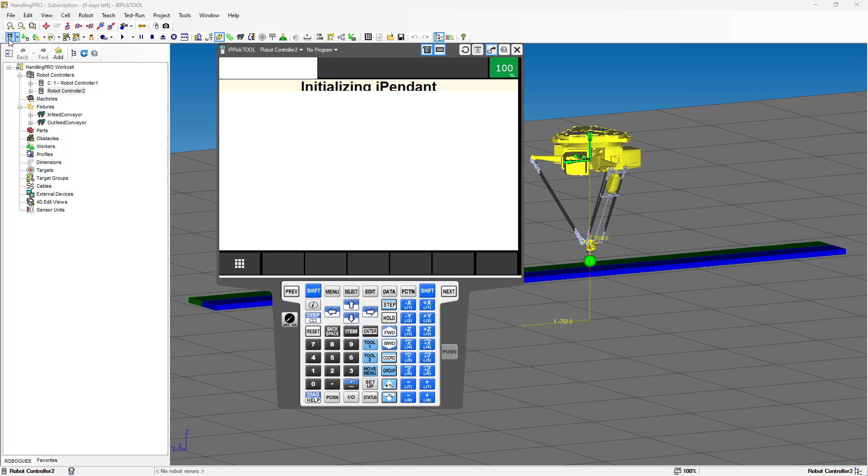We're going to go back to Roboguide. We're going to select robot number 2, and we're going to open the teach pendant. Make sure that you have the teach pendant open for robot controller number 2. We're going to press menu. We're going to select setup. We're going to select host communication.

We already set up the IP address. So now we need to select RIPE. This is ROS Ethernet Packets. And we're going to press detail. So here, robot number 2 is going to be the slave. And if you look at the setup RIPE screen, it's showing the master. So we have to make sure that we select the slave.

So over here, we're going to select slave. And you're going to see that this button changes from slave to master, and on the screen, it changes to slave. So we're going to look at the robot name. It's going to be robot number 2. The port, in our case, we are using the Ethernet port number 1. We need to leave it that way.

The master IP address is going to be robot number 1. We need to change this one to 127.0.0.2, and automatically it changes to number 3. The member index 1 is always going to be the master, so this robot number 2 is going to have member index number 2. If you keep adding more robots, you're going to increase the index by 1.

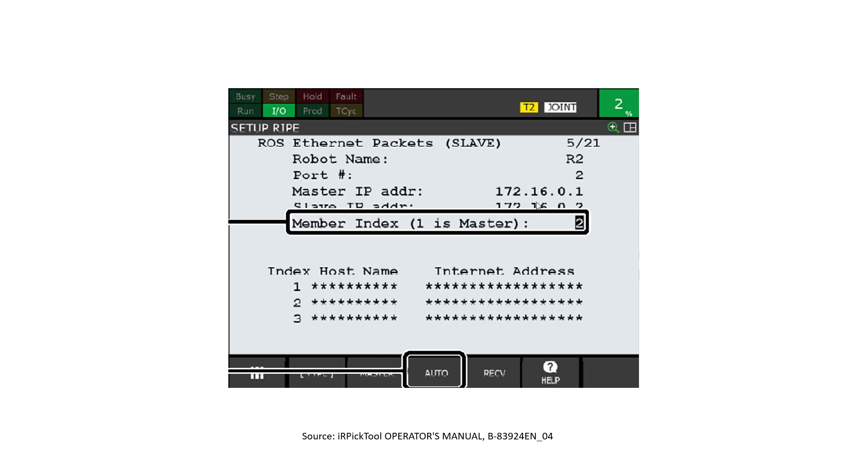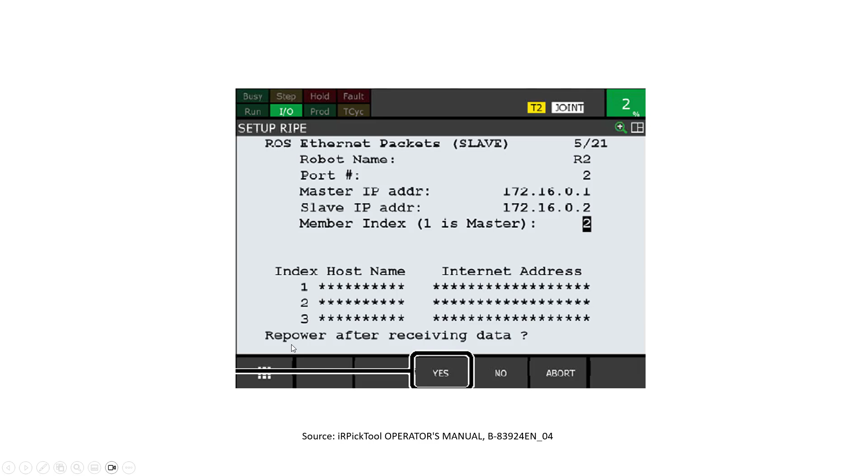We have the name of the robot, it's going to be number 2. In this example, they are using port number 2. And we have the IP address for the master, and we have the IP address for the slave. And the member index is 2. So at this point, we're going to press auto. The screen is going to change, and it's going to say repower after receiving data, and we're going to select yes.

And at this point, the screen is going to change again. It's going to say waiting for data, press PREV to cancel. And we're going to leave the slave in this state. And if you have more than one slave robot controller, you need to do exactly the same for all the other robot controllers until you finish with all the slaves.

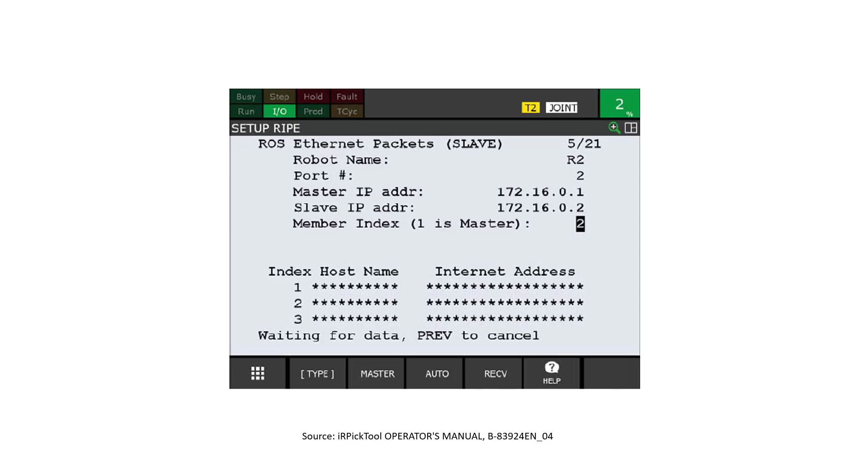Now we're going to go back to the master robot controller. We're going to change the teach pendant to robot controller number 1. We're going to do exactly the same. We're going to press menu, setup, host communication. We're going to select RIPE, and we're going to select details.

In this case, robot controller number 1 is going to be the master, so we have to make sure that it says master over here, otherwise you just invert it by pressing slave on this selection over here. It's going to show the name of the robot. It's going to show the Ethernet port that we're using. This is port number 1. We need to select the IP address.

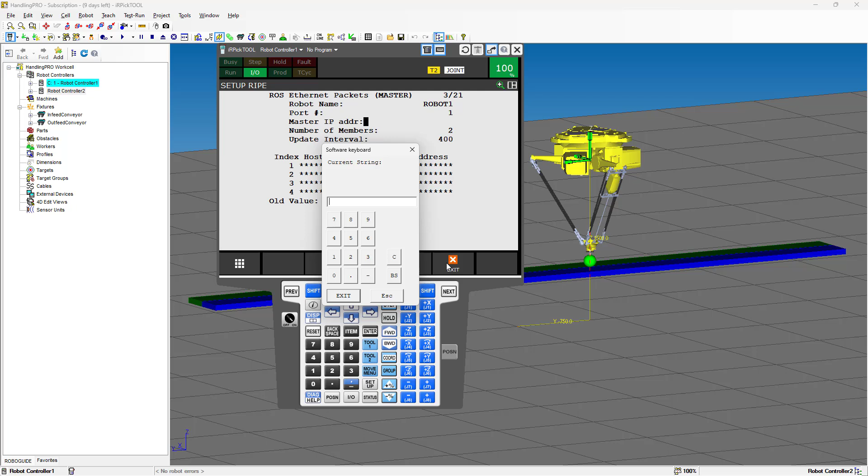The number of members is going to be 2. And the update interval is going to be 400 milliseconds. This update interval is something similar to the requested packet interval that we have in Rockwell PLC. It's saying how many milliseconds it's going to take for updating the data for the other robot controllers. If you find that the update is very slow, you can decrease this value, but by default it's showing 400 milliseconds, and we're going to leave it that way.

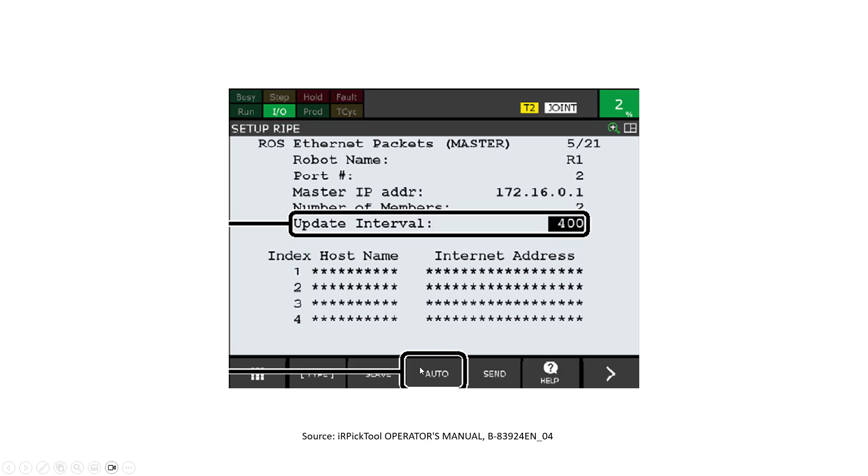So now at this point, again, I cannot show you how it's going to look in Roboguide. We need to go back to the screenshots. This is a screenshot for the master. We're going to press auto again. It's going to say put all the slaves in auto mode. We're going to select continue. And it's going to say cycle power for setting to take effect, and we're going to select yes. And when we do that, all the slaves and the master are going to cycle power at the same time.

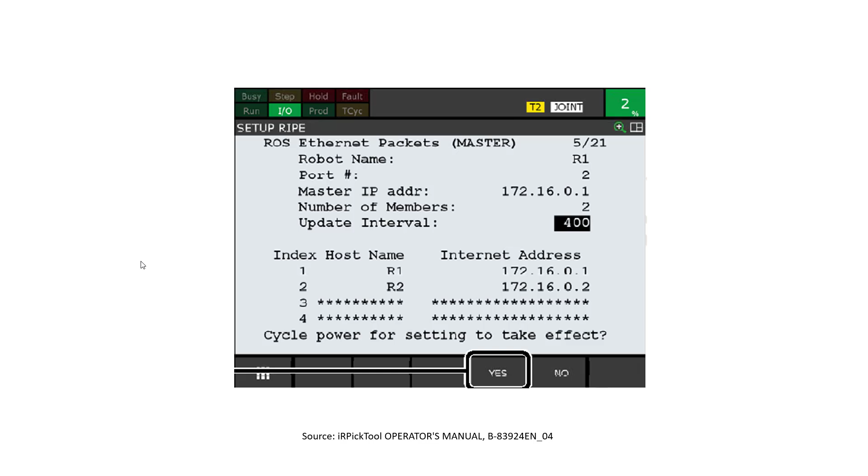We're going to go back to Roboguide. We're going to select cell, and select RIPE setup. It's going to show a pop-up window. Over here, we're going to select robot controller number 1. The host name is robot1, and it's showing the IP address. And we're going to select robot controller number 2, the host is robot2 with its own IP address. It's going to show again the update interval is 400 milliseconds, and we're going to press apply. And we can close the window. So this is the way that we have set up the RIPE ring on Roboguide.

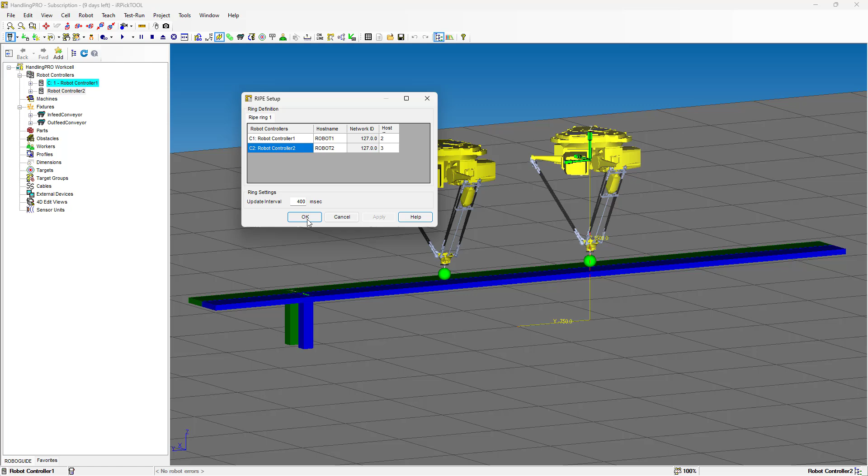And now it's just cycling power on both robot controllers. After rebooting, we're going to select robot controller number 1. We're going to press menu again, go to setup, host communication, RIPE, details, and you're going to see here on the host name the list with robot number 1 and robot number 2 and their IP addresses. If you go to robot controller number 2, it's going to show exactly the same list.

One more thing that you can do to verify the communication between the two robots is working: immediately after cycling power, you can select menu, alarms, alarm log. We're going to select history, and you're going to see that you get the alarm RIPE-008 robot number 2 is online.

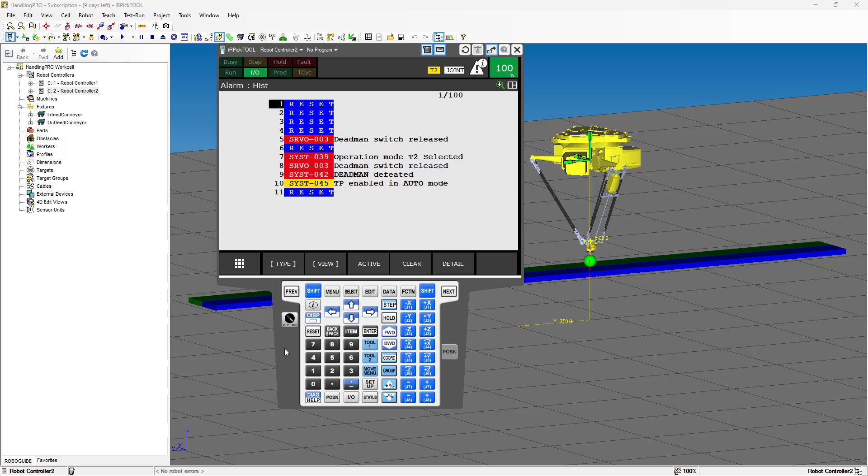If we select robot controller number 2, we're going to select menu, setup, host communication, RIPE detail, and it's showing here in the list. And we're going to select menu, alarms, alarm log, history, and in this case it doesn't show anything. It's only on the master. And with this, we have finished with the configuration of the RIPE.

We're going to go back to the iRPickTool setup workflow. The next step is setting up the encoders for the infeed and outfeed conveyor on the robot master and slave. First, we need to decide what type of encoder we're going to use. There are two types of encoders: the serial incremental encoder shown on the left and the incremental encoder shown on the right. In our case, we're going to use the one on the right.

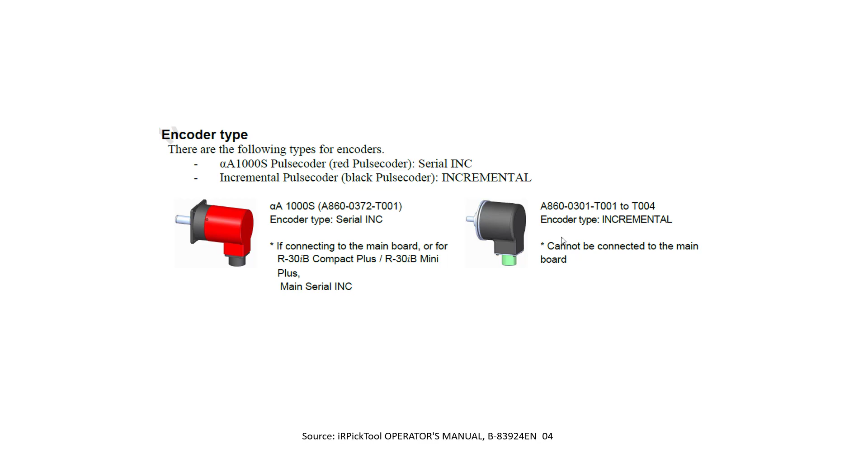Next, we need to decide how we're going to connect the encoders to the robots. One way is using the line tracking interface, where we install the line tracking interface board in the master robot controller, as shown in this diagram. The infeed and outfeed conveyor encoders are connected to the line tracking interface board, and using the RIPE ring, we send the pulse counts to the robot slaves.

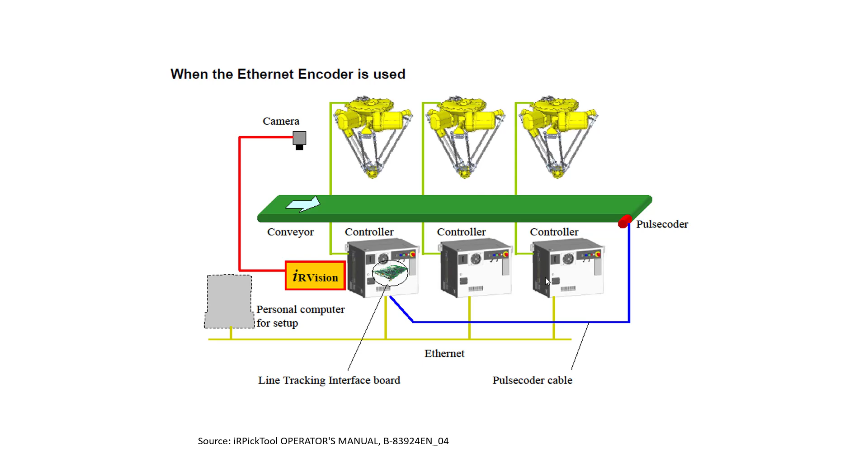Another way is using a multiplexer, where we have a line tracking interface installed on each robot controller, and we use an encoder multiplexer to send the pulse counts to each robot. In our case, we're going to go with the first option, where we have only one line tracking interface board.

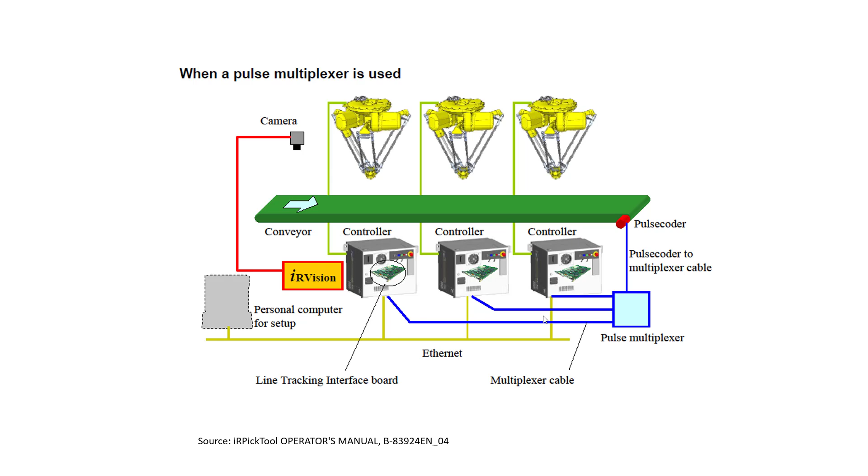In this diagram, you can see what the line interface board looks like. There are two options, the mini slot and the wide mini slot. It all depends on the robot controller that you have. In the case of the LR Mate robot controller, you need to use the mini slot, and you connect both encoders

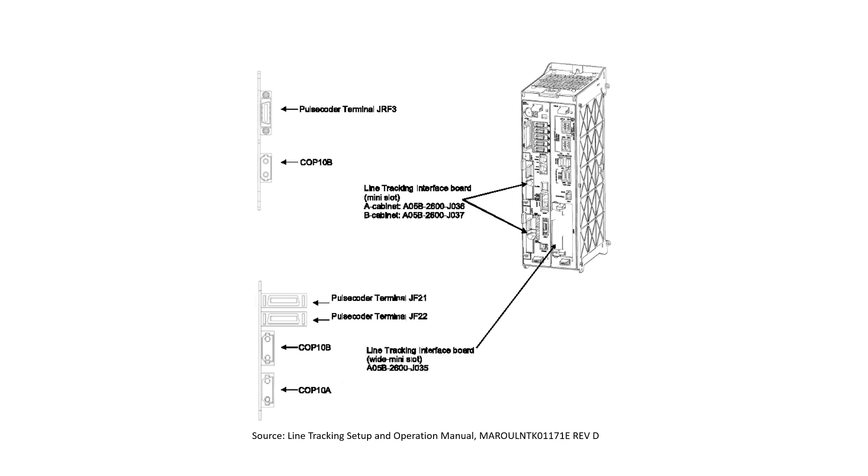to the JRF3. In this diagram, you can see how you connect the infeed conveyor encoder and the outfeed conveyor encoder on the same connector on the JRF3. And if you have the wide mini slot, you have two connectors, the JF21 and the JF22, where you connect the infeed conveyor encoder to the JF21 and the outfeed conveyor encoder to the JF22.

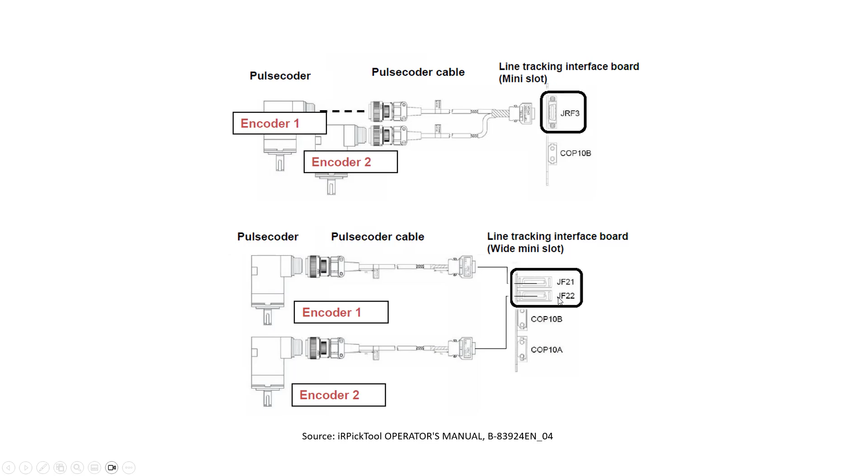We're going to go back to the workcell, and we're going to configure the encoders. One thing to notice is that in order to use the Ethernet encoder, all the controllers connected to the ring must have the same software revision. We're going to select robot controller number 1, and we're going to open the teach pendant. I'm going to split the screen.

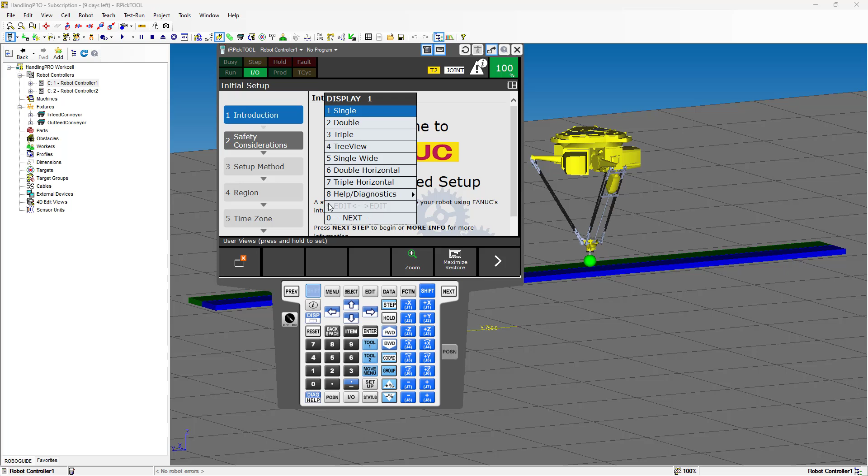I'm going to select menu, setup, and encoders. Encoder number 1 is the one connected to the infeed conveyor. Make sure that you have the Ethernet encoder option R762 installed, otherwise you're not going to see lines 10 and 11. So we're going to select encoder axis. Here you can select the encoder that you want to use. We are not going to change the encoder. It's encoder number 1.

Encoder type, we're going to have the incremental encoder. We're going to go to encoder enable, and we're going to enable. You can change from off to on. Current count, we're going to change that. Average update, we're going to change that to 10. The 10 is the normal value that you use to smooth out the encoder.

And then we're going to select line number 10, where we're going to enter the index for the Ethernet master RIPE ID. That's going to be 1. And the encoder master is going to be 1.

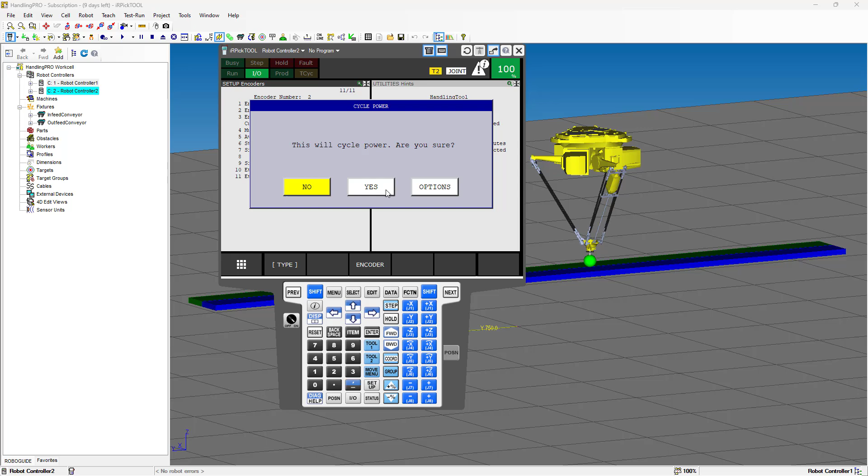Master is going to be 1. And the Ethernet master encoder is going to be 2. Now we need to cycle power again in order for it to take effect. We're going to select robot controller number 1. We're going to go back to the encoder and we're going to select encoder number 1.

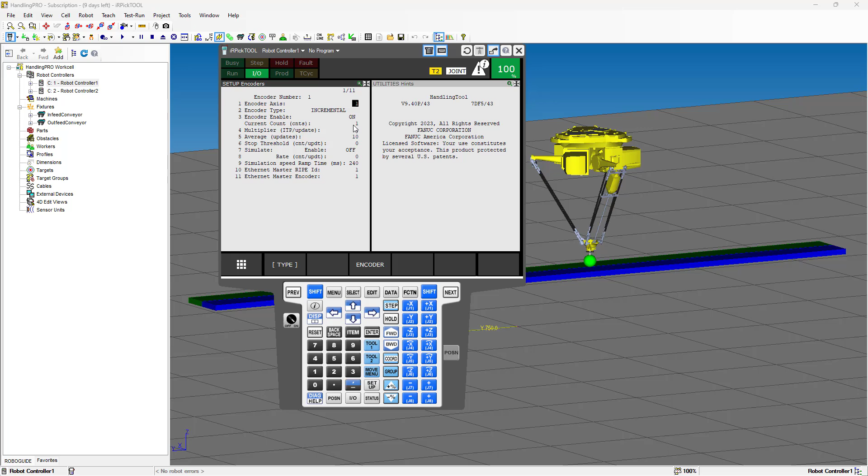So the next step, we need to verify that the values on the infeed and outfeed conveyor encoders are getting updated here on the current count, and also that the current count on robot controller number 1 is the same as the one that we have in robot controller number 2. For that, we're going to select over here, and you're going to see that we have a control window where we can select the conveyors.

We're going to select the infeed conveyor. We're going to change the speed. And you're going to see the line here is going to start moving. This line is the tracking frame for the infeed conveyor. So we're going to press forward, and you're going to see that the infeed conveyor starts moving. We're going to go back to the teach pendant, and you're going to see that the current count is updating with the value from the encoder on the infeed conveyor.

We're going to take note of this value, and this value should match the one that we have on robot controller number 2. But first, we're going to select the outfeed conveyor. The current count is 1. Over here, we're going to select the outfeed conveyor. We're going to change the speed. And we're going to move the outfeed conveyor.

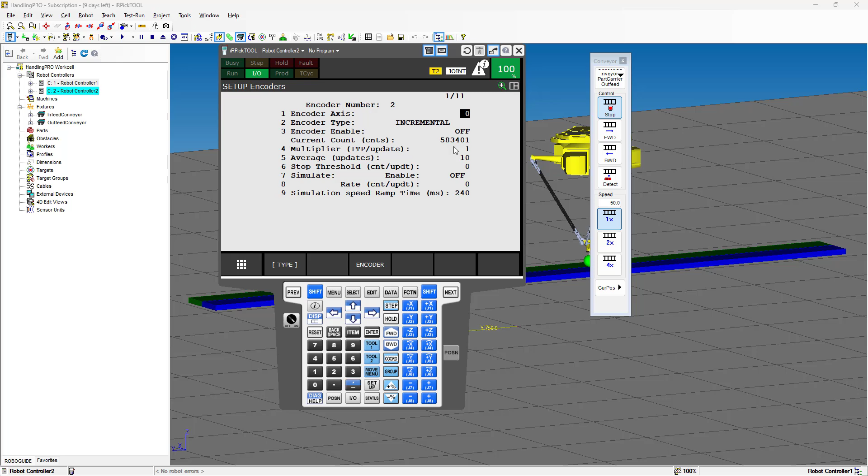We're going to go back to the iRPickTool setup workflow. Our next step is finally getting into the setup for the iRPickTool, and we're going to start by setting up the iRPickTool objects. For now, I just want to give you an overview of how the iRPickTool objects look.

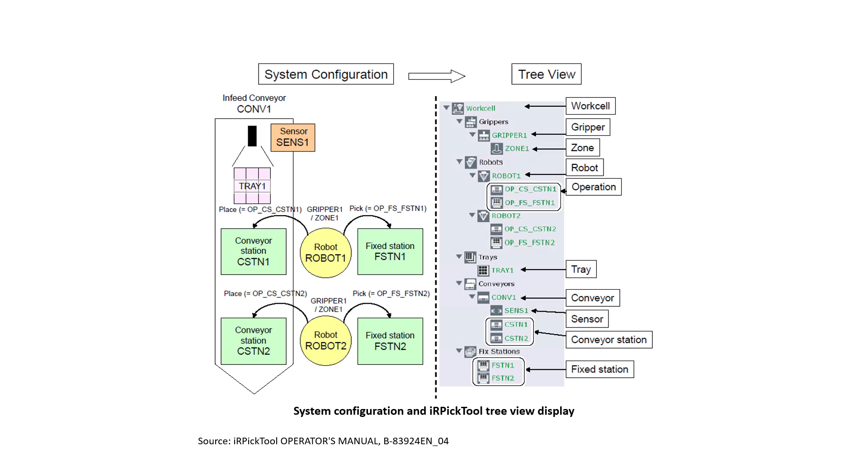To summarize, on this video we covered the setup for the robot ring using RIPE, that stands for Robot Interface Packet over Ethernet. This setup is required because we need to send the infeed and outfeed conveyor encoder pulse counts from the master robot controller to the slaves, plus the rest of the communication that we're going to have once we set up the iRPickTool objects.

Also, we set up the encoders, and we verified that the encoder counts are getting updated on the master robot controller and the slave robot controller with the same values. This is critical because, as we're going to see later, the setup of the tracking frame on the infeed and the outfeed conveyor and the tracking frame for the vision system depend entirely on the accurate value for the encoder counts.